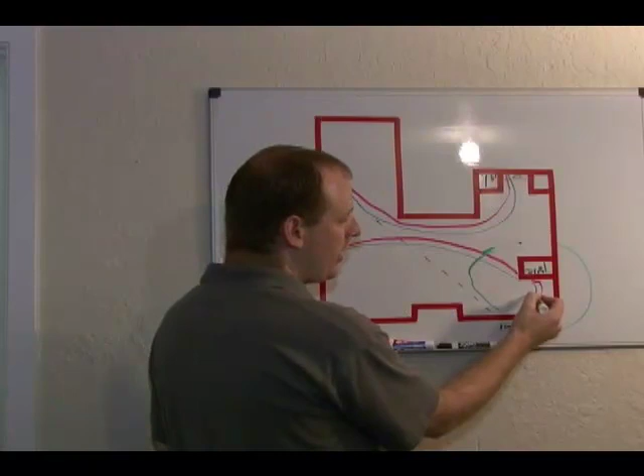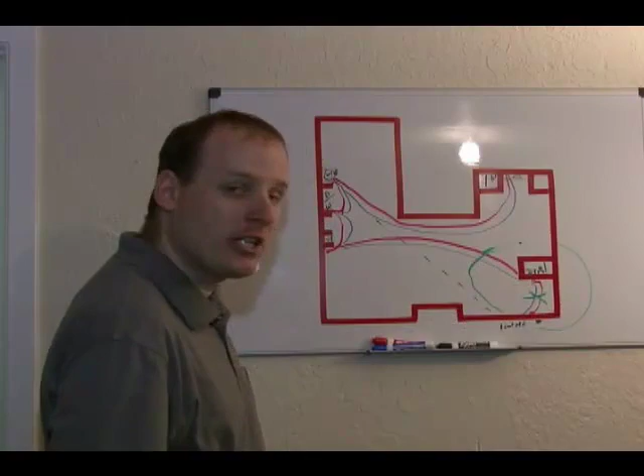We're going to say that the actual leak is right here, okay? And we're going to say that it's on the cold water line, and it is right here on the line going to the outside faucet. Now, at this point, we really have several options as to what to do about fixing this leak, okay?

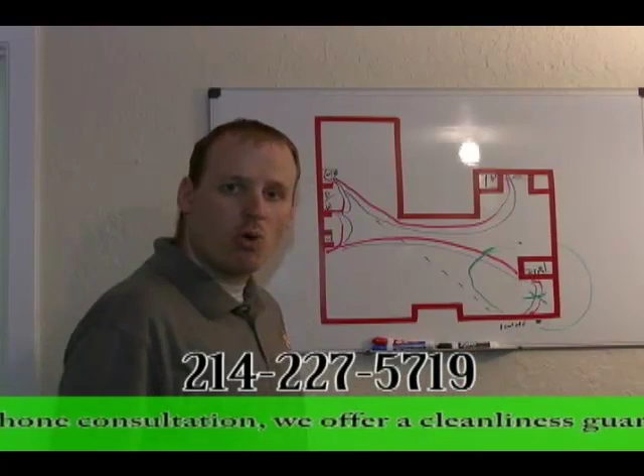Technically, you could go in here into this wall, cut into the wall, find the line that is going to the outside faucet, and cap it off. You would then have no outside faucet, but it is technically an option to do that, and you would not have to actually go through the slab.

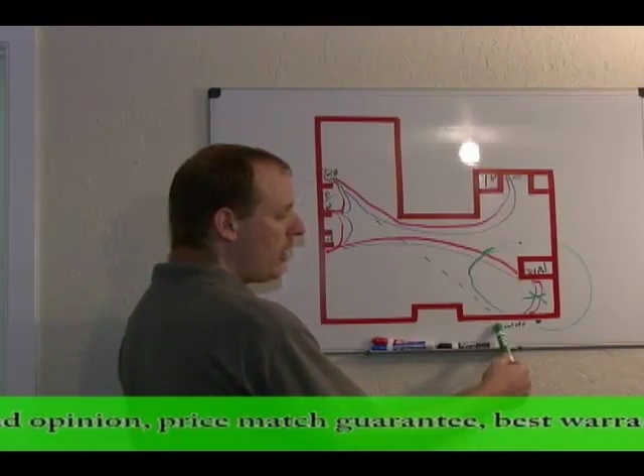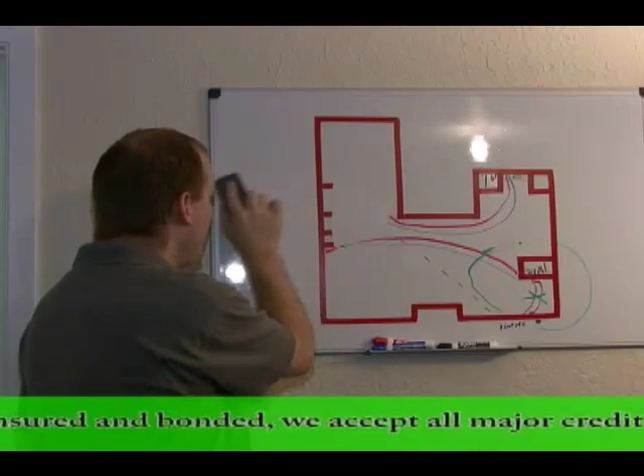Now, if we did that, we could come in here and cut into the water line right in here in this area, and run a new outside faucet to this area out here and do away with this and never have to go under the slab. That is one option. However, let's just say for this example that we know the leak is here. None of this matters anymore, so let's erase all of this.

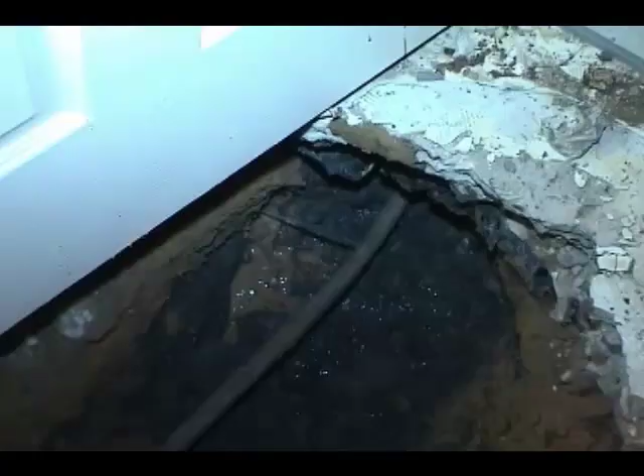You know you got your leak right here. What we would do at that point is we would punch a hole through the slab to actually make that repair. So we would punch a hole. You know your line is going right down through here. Your leak is here. We can go right down on top of the leak and actually uncover it, cut out the bad piece of pipe, put in a new piece of pipe.

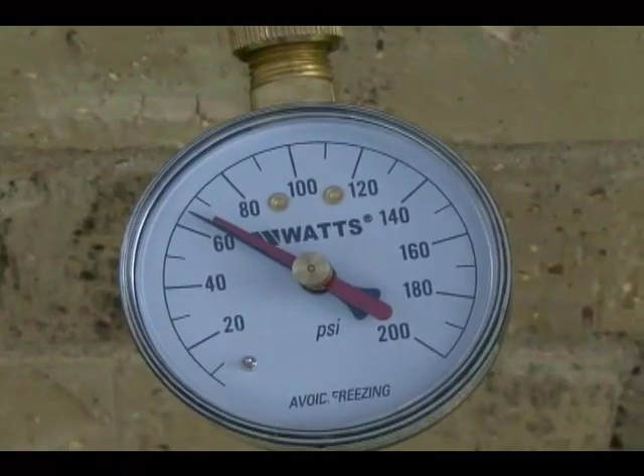Again, retest the system. We want to retest the system to verify that our leak is repaired and that there's no additional leaks in the line. Once we know there's no more leaks, we would then put the dirt back in and the concrete back down. Let's assume there's carpet on the floor in this bedroom. In-House Plumbing would put the carpet back down if necessary in that bedroom. And so that is actually how we would repair that leak.

Now, a couple of important notes. When we jackhammer through a slab, jackhammering has a bad connotation all over the place. We work extremely hard to keep the dust down. We're very, very good at that. We also have a cleanliness guarantee where we will guarantee you that it will be clean. Will it be spick and span? No, maybe not. But it will be clean enough that you will accept it. I can promise you that.

And if you're not satisfied with it, we'll give you $40 towards the price of having a professional cleaning company actually come in and clean that area. We're so confident in what we do to keep that dust down that we will do that.

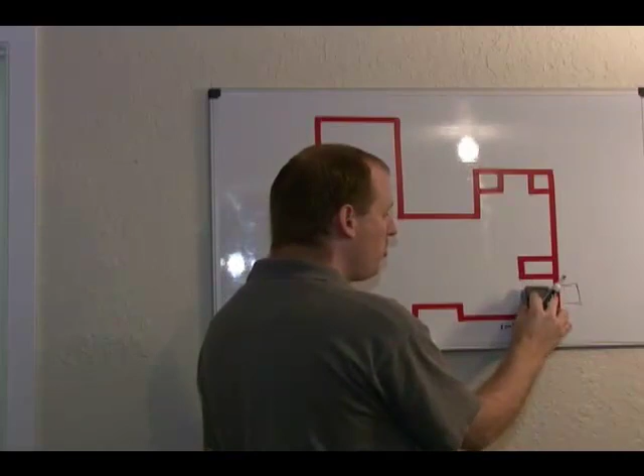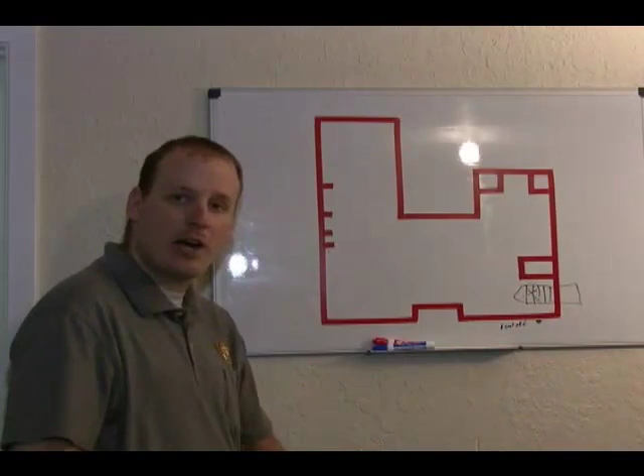Another important note, very important. Some people ask us on a regular basis to actually tunnel from the outside to fix a water leak under a slab. So let's say we were to make an access hole here, and instead of punching this hole through the slab, we actually made a tunnel like this and got to the leak that way. Now, In-House Plumbing does not recommend fixing a freshwater leak by tunneling under a slab.

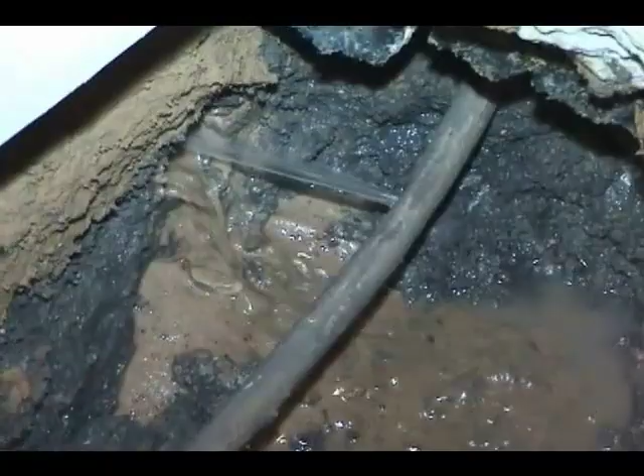First of all, you have the safety implications. Because a water leak leaks all the time, it's constantly leaking. It's just like turning on your faucet at your kitchen sink and leaving it on. It never stops until you turn off the water. Because of that, this dirt in this area is very undermined, so to speak.

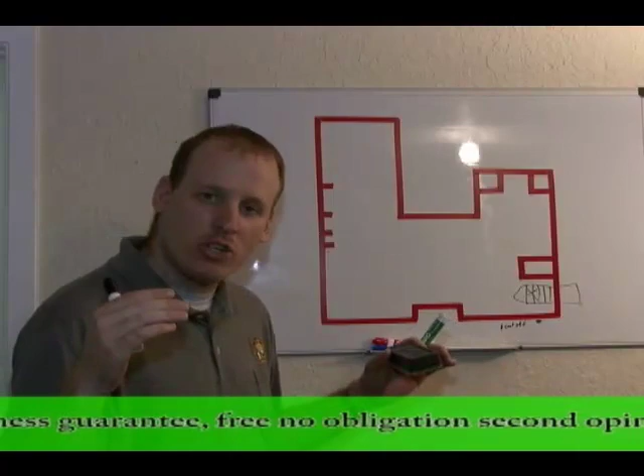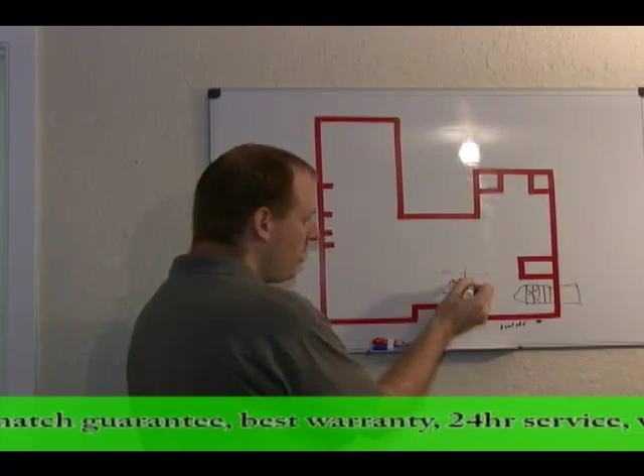It is unstable. It's not in good condition, good situation. So as you're tunneling in there, you cannot make proper walls for safety purposes to actually get a man to crawl down in there. What happens a lot of times is the dirt literally collapses. If you've got a tunnel like this, this dirt will collapse to the inside, and so basically it's just kind of mush that you're taking out of there.

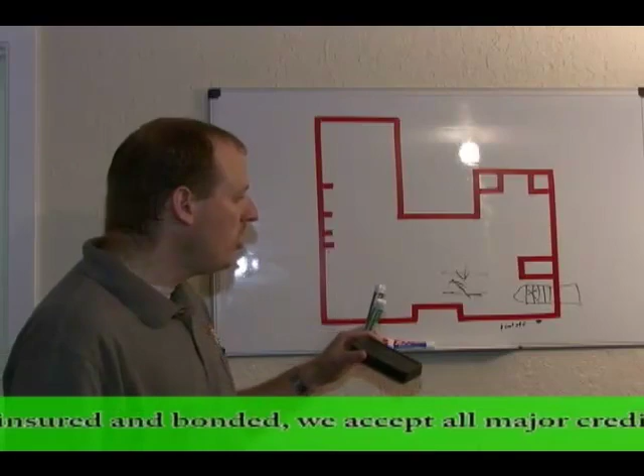So it's very unsafe. The other situation is with copper especially: when you are trying to repair the leak under the slab, you will have to solder it. And you have to actually do a special type of solder with a leak under the slab, which is called silver soldering. That's another very, very important note. You don't just want to regular solder a leak under the slab, you want to silver solder it. It literally brazes it back together like it's now one pipe, especially if it's done right.

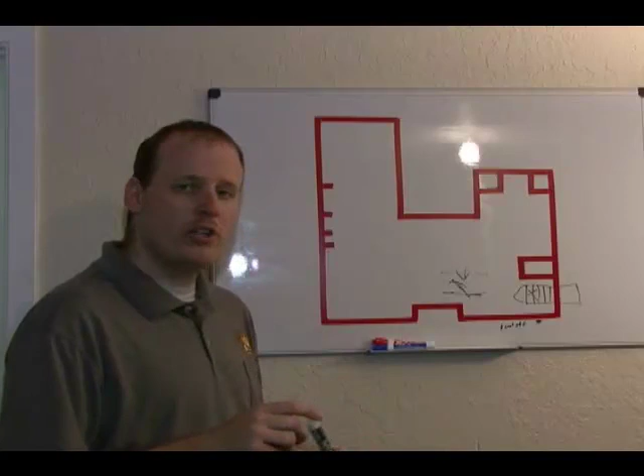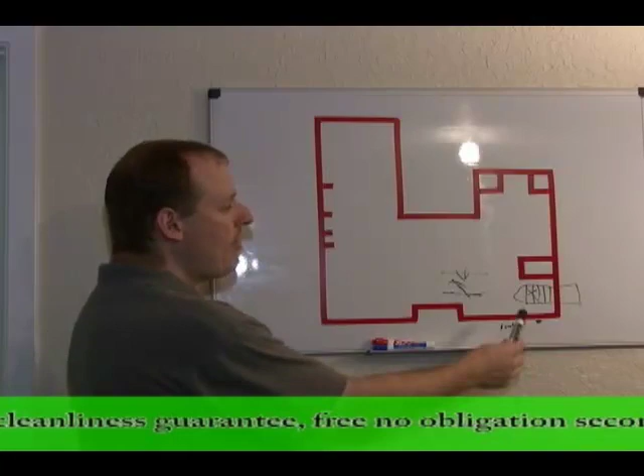If you're silver soldering a leak under a slab, you have to get the pipe extremely hot to actually be able to solder that. The more distance you tunnel in, the less oxygen you have in that tunnel. You need a bunch of oxygen to be able to create the heat that you need to solder that pipe. And so it's very dangerous to have a man down in this hole where there's no oxygen. The oxygen that is in there is being taken up by trying to solder that.

The other thing is, not only is it dangerous for the man, but you're also not going to get a good solder on that pipe. It's just not going to happen. In-house plumbing, in our 8.5-year history, we had one leak recreate itself after we repaired it that we know of. And that leak, we tunneled in about 7 feet to fix that leak. We know for a fact that the reason we had that leak is because we silver soldered by tunneling.

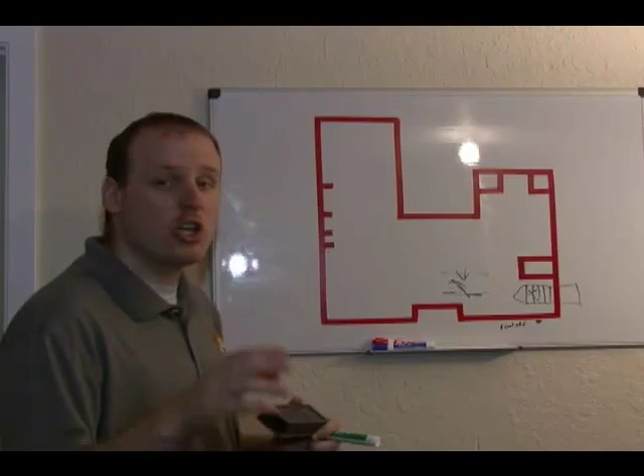My man got sick in the hole, and the leak created itself again and caused about $10,000 worth of damage on a house. So it's not a good idea to tunnel. Now, there is one situation out there that we have actually not done to date, but we are seriously considering it, so you might check with us on it. There is a type of compression fitting that we can probably use under a slab.

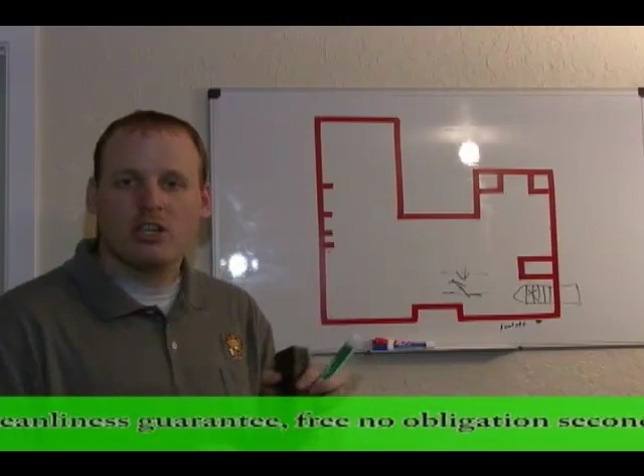In-house plumbing has not been a fan of compression fittings under the slab. This is basically a situation where you compress a coupling onto the pipe. The problem is it's nowhere near as good as silver soldering, and if something moves and that compression coupling comes apart, you've got the leak all over again. So we have not recommended that. However, there is one type of compression fitting that we may use to tunnel under a slab in certain situations if we can ensure the safety of our individuals as they're tunneling underneath there.

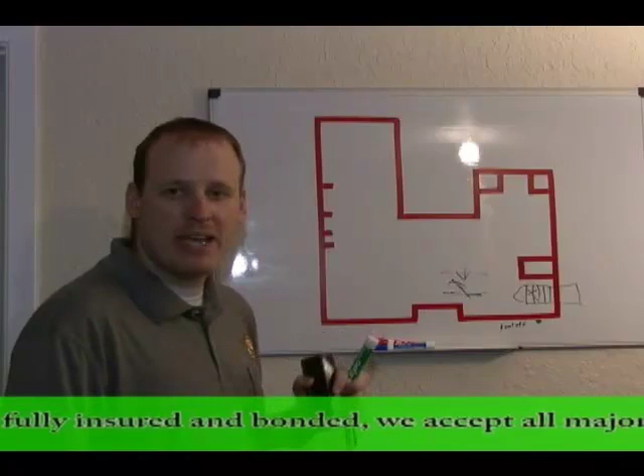So please check with us, but generally we say it's always better just to punch a hole through the slab to make that repair. No matter what, if you're trying to tunnel 20 feet to fix a water leak, you can replace a lot of floor coverings. You can clean the entire house for the price difference between tunneling 20 feet and just punching a hole right through the slab. Literally, in some cases, you can almost remodel your house with the price difference some of these guys are charging between those two.

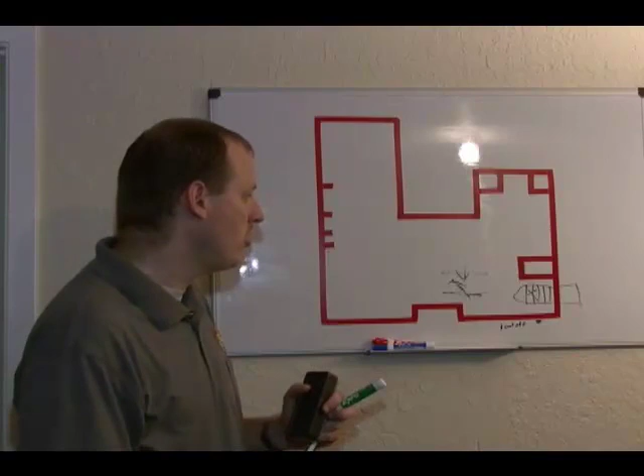All right, so this is how we would repair a water leak under the slab.